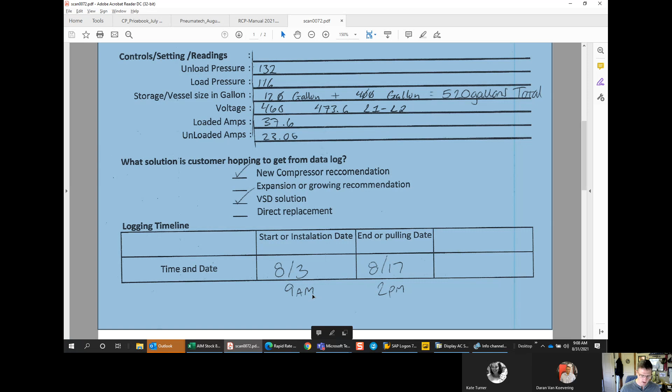And then the next page on this that I recently added was just a block diagram, right? Just tell me in general what they have. So literally, it doesn't have to be fancy. They just drew this out, right? Box with a compressor to a manifold out to 2 tanks. That just gives me an idea of what I'm working with.

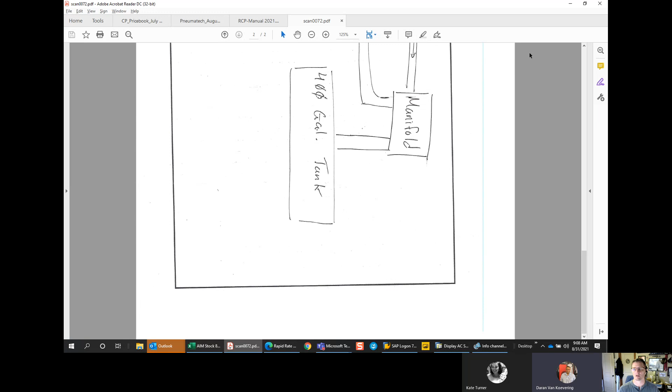Okay. So what I do from there is I come into AirChitect, and we're just going to start a new project presentation. So we click on this first one, name. I'm going to put warehouse services, Portland compressor, evaluate compressor room, company name, services. I'm assuming this is Oregon. They didn't give me a contact person. They didn't give me any of that information. So I'm just going to click next.

This is where we change it. Right now it's at 12 cents. So we're going to change that to 0.065 because that's what they're saying they pay, which is ridiculously cheap.

Do you ever have people just straight out say they don't know? Oh yeah, most people that don't know, I just use 12 cents, between 8 and 12 as the average. And I do it for 48 weeks a year. There's 52 weeks in a year. I just choose 48. It's also the default in the system, and it works pretty good.

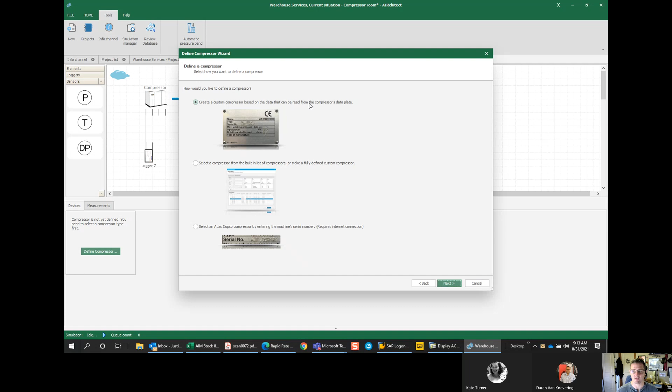We'll click next. We're going to create a custom based on the data that can be found on the compressor's data plate, which hopefully they gave you that information on this critical data sheet, but most of the time they don't. So we got to kind of wing it. So the name of the compressor is just compressor, right? We can say compressor 1.

Manufacturer is Chicago Pneumatic. It's red. Actually, we're going to make it gray. It's a fixed speed. He said it's a 50 horsepower, max 125, and it's 460 volt. And I got that information off of the critical data sheet.

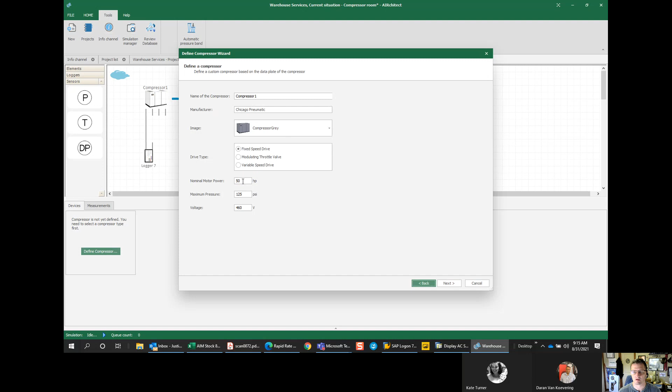60 horsepower. Hold on, wait a minute. No, I put in 50 horsepower. Okay, all right. So package horsepower is 50. I don't know why it said 60. And the CFM on this is 230. And unload power, I don't know what it is. I'm just going to leave it at 15 because that's fine. I could actually go in and find out, but I'm not going to worry about it.

They have this sucker way maxed out at 132, which I don't know if it'll take it, and 116. We'll see what that does, and then finish. So now we're telling the program this compressor is at 50 horsepower. Now we're going to upload that data. So all I'm going to do is I'm going to take my logger here and I'm going to take my cord and I'm going to plug it in.

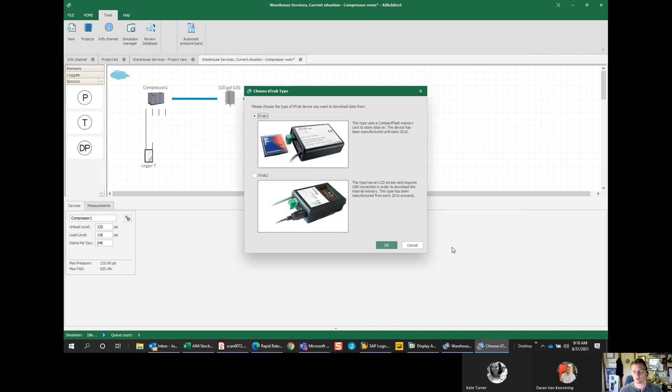And then my computer should find it. This is an iTrak 2. So I'm going to click OK. I'm going to find it on my computer, and we're going to hope to God that it downloads. And this one is going to work because it's saying read log. So when you see read log and that bar going across, it's actually pulling data from this logger.

Now, when I ship the loggers to distributors, I do not put batteries in them. They can put their own battery in it. And then when they ship them back, I just tell them to leave the battery in it. It doesn't matter. This one should still have the battery in it. Let me check. Yep, it still has the battery in it. And it should work. So now that you see the bars next to the iTrak logger here, it's filling up. So that just means it's actually working, which is good.

So what if they pull the battery out? Does it still have all the data and everything? Doesn't lose any of that, right? It shouldn't, no. I've had it do funky things and had to put a battery in it. And as long as I can go back and pick the date that they started, it tends to work just fine. But like this one here, if we look, this is a verification. Okay, so this one, we got the voltage. It's got data on here from 6/9 to 7/13. And we logged from 8/3.

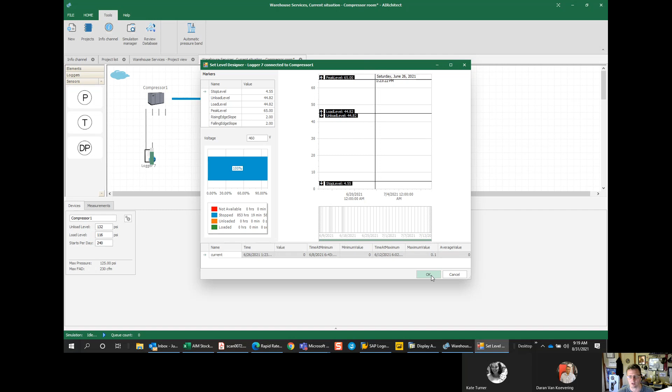So we're just going to say this is correct when in reality it's not, because they told me that they started it on 8/3 and 8/17, and there's nothing on these dates within this table that are remotely close. So I'm just going to click OK for now, just so we can continue on. We'll say that's right, but it's really not. So I'm going to have to ship him another logger, and then he's going to have to put a battery in it. All right, so at this point, when you have the little blue globe, that's good. That's what we want.

So this is the current situation. You go back to the project view, and we have the imported compressor room. Now the profile is disabled, which I have no idea why. We're going to save this here. Oh, here it goes. Now we're running down here in the bottom simulation. So now that I picked this compressor and uploaded data, it's just going to merge it together, is basically what's happening here. But now we just have to wait.

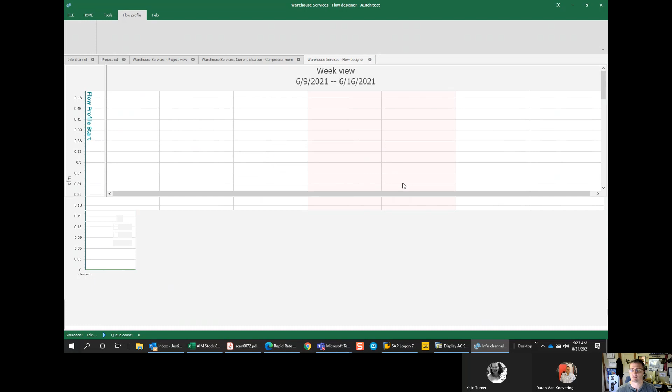Let's go back. There was like nothing on there. There's nothing there. How I can tell that there's nothing there is this is just a simple bar graph. Okay, if there was actually data here, it would be all over. There'd be a graph going across this. This is a workday, workday, workday. These pink columns here are the weekend, right? So this is Friday, Thursday, Wednesday, Monday, Tuesday. So this is 7 days. There's just no data on this thing.

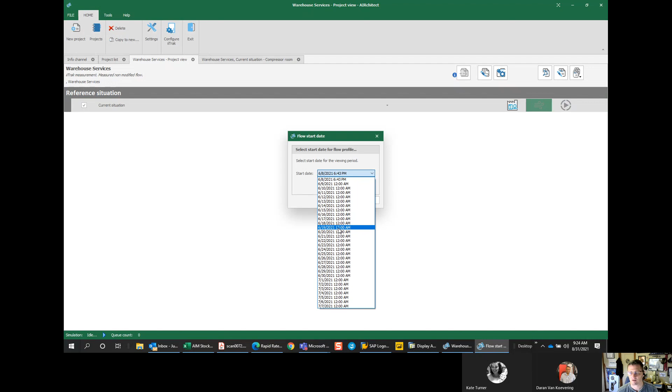So let me go to 6/16, see if there's something there. There's not going to be. You can tell by the dates. Yeah, there's no data here. Okay, so this is what we're going to do.

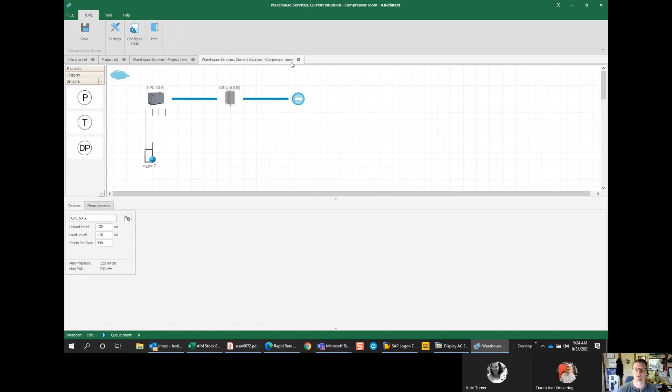Remember, Justin, you don't have to waste your time. Daran and I are always in. Next time you get one, just holler and we'll walk through it all together. This at least gives us an idea, at least preps us for it. So, like, don't waste your time with this. Oh, you're good. I'm just going to go to a different one and show you guys.

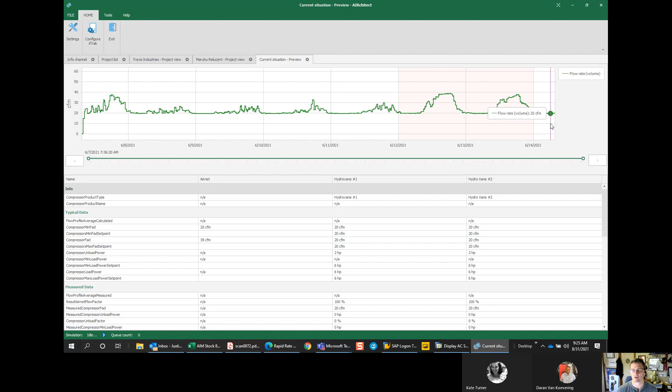Because the beginning is still all the same. These are all data logs that I've done over here. Here we go. All right. So this one. So this was the situation, right? This was the compressor room. So this is where we went through and picked that date, right? Once we pick the date and it picks those 7 days, we just have to look at the data. So here's the current situation. See, this is the flow all the way across here. So this is Tuesday, Wednesday, Thursday, Friday, Saturday, Sunday. So they're running it all the time.

This magnifying glass here allows us to zoom in a little bit more on the data. So the situation here was they had 2 Hydrovanes, okay, with 180 gallons. And down here on flow pressure status, I'm going to click on this other magnifying glass to zoom in to have an idea of what's going on. Okay, so if there would have been actual data on this logger from Portland Compressor, this is where we would be. So this is this 7 days.

So what I'll do is I typically export to PDF this day, so we can look at it and have a conversation with the distributor and the end customer. And then what I'll do is I'll grab this. Hey, why that day? So that's just the starting day? Is that what that is? This is the week. This is all 7 days here. So you're going to export all of them? Yeah. So, and what it looks like when I do that, because this is Maru.

Let me see here. Hold on. Maru. Who is Maru with? But it shows that like number 2 is just running unloaded all the time. Don't you ever have to adjust some of the kW so that it's actually capturing and showing loaded? Do you ever get it where it just shows that it's running unloaded all the time because it didn't get the kW right or something? Hold that thought.

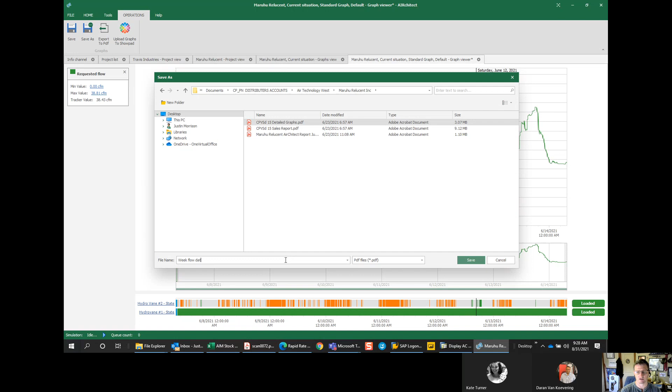Let's see here. Maru sent. Hold on, I'm finding the. Oh, that's not what I wanted. Air Technology West. Okay. So what I do here, I had to remember where I saved these files. Bear with me. Air Technology West. Here's Maru. So this is week flow data. I'll show you what that looks like here in a second.

And then on the left over here, this is CFM. And then down here's the date stamp. So what I'll do is you click and drag this over to zoom in on a day. And when you zoom in, you actually see what's going on. Now, I pick the heaviest day, right? That way we can actually have a conversation of what's going on.

And what I mean by that is, if you look here, you have peaks and valleys, right? So on Saturday here, it's at that high flow for the longest. So when I zoom in and I do a day, I will export this and say day flow.

Because sometimes going through all the work of doing a report is useless and they don't really know what's going on. And you can just have a conversation with these simple graphs or ask some questions.

Come on, catch up to me.

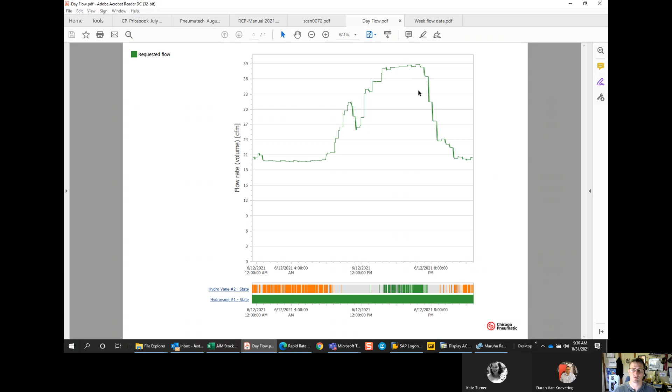You have a very constant 21 CFM load or leak load. That could be the leaks in their building, or they're running a CNC machine at night, something. And then whatever you start at, roughly 8 a.m. in the morning, your flow goes up. And then for 4 or 5 hours, you have a constant 36 CFM demand. Does this sound right? And they'll say yes, no, they don't know, whatever the case may be. That's where you can actually show them the data of what's going on.

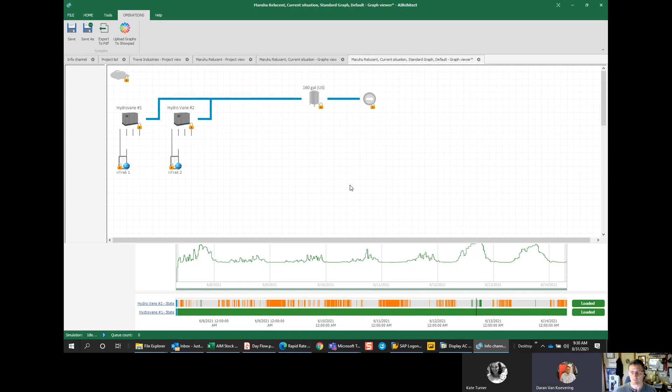Okay. So when you look at that magnifying glass, it's just a snapshot of what's going on. So now we look at all of that information, and then we actually come up with some simulations. So let me go with this Travis here. Back to Maru. So on Maru here, we're going to say those two machines we want to replace with the QRS 15. So on this button, you add a new proposal, which gives you a new factory.

I click and drag a compressor over. And then I added it into their system. So this is the QRS 15 base mount. Here it is here. I added it to their existing situation. And now I'm going to run it and see what this 15 horsepower will do for them. What AIRchitect does is it takes that data from the original equipment, and it says, how would this QRS 15 run in that same situation?

And then I ran a variable speed as well, which is the whole idea behind AIRchitect, to sell variable speeds. So I ran a simulation for both, and this is what we ended up coming up with. This one's actually running right now, so it's only 30% done. But you're adding this to the system, right? You're not saying to remove any of their existing equipment?

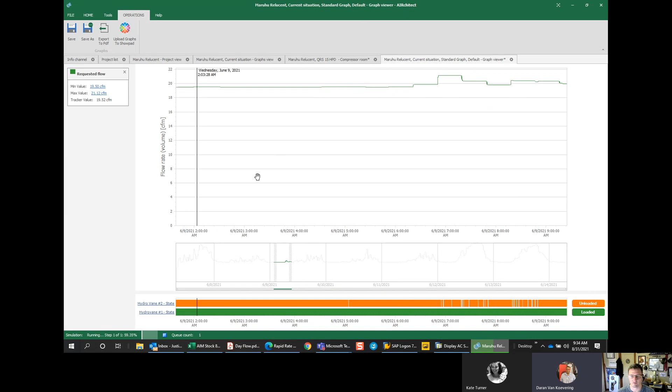Yeah, well, absolutely. So that's where you're just looking at the highest demand and the lowest demand, right? So if we look at the lowest demand, let me zoom. We'll go here. Yeah, look, you have a machine that's completely unloaded for hours at a time. Yeah, see, that would be more an issue with settings or something like that in the machine itself, right? Because that's not normal. It shouldn't be just kicking on and immediately going to an unloaded state. I mean, it should always start loaded at the beginning of every one of those breaks.

Yeah, yeah. I mean, and that could be fixed potentially with a pressure adjustment, right? The pressure band might be too tight. I mean, you're saying it could be in the machine itself, but couldn't it also be in just the data that was imported or selected at the beginning? If you have maybe the loaded KW just a little bit too high or something, then it won't quite reach that. It'll keep thinking that it's unloaded every time it's really loaded.

Yes and no, but I mean, we're not really using real KW. We're using the amperage, and we're using the algorithm to generate a report. It takes an amp reading every second, and with the load and unload settings, we generate what the KW usage is, and then we estimate what that power is. The issue that we have with these is that ultimately it's a guesstimate, right? And it's just the machine. It's not the entire system.

So that's why the QRS 15 HPD is negative 25%, and this variable speed is 14% savings, which is better. But if I went through and really adjusted and modified the settings on this 15, I could get that down to zero, if not 12% positive, because I can actually go in and adjust and modify the controller settings itself. Right now, it's set at a default unload minimum of 3 minutes. Well, I can just cut that down to 20 seconds and shut that machine off, you know?

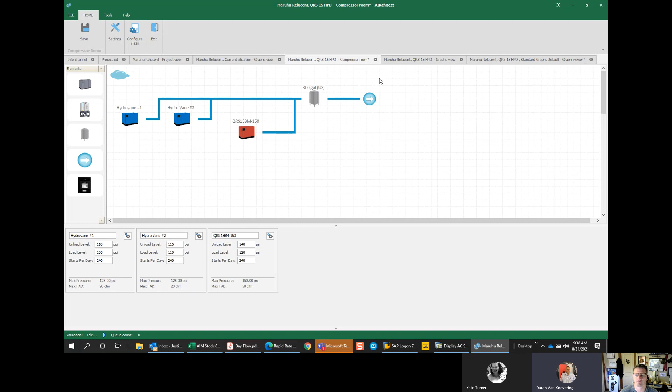So that's what it looks like. And then when we go to the low demand and we zoom in, you can see the sucker just loading and unloading a lot. So the 15 horsepower is going to help them, no problem. It'll handle it. It's not a bad choice, and the reason that I say that is this gives them room for growth. We went from 40 CFM to 50 CFM. Okay, so I mean he's got roughly 20% growth there. That's not bad at all.

But if we look at the variable speed and we go to the same graph, now we can do the same thing. Let's look at this heavy demand. And I can export this too if we want to PDF and have a conversation with the guy. It just depends on your customer. And we can zoom in and you'll see the variable speed. Wait a minute. Oh, I'm on the wrong one. No. Sorry, it didn't open up the right one. Graph view, close. CPVSD, here we go. Here's the variable speed.

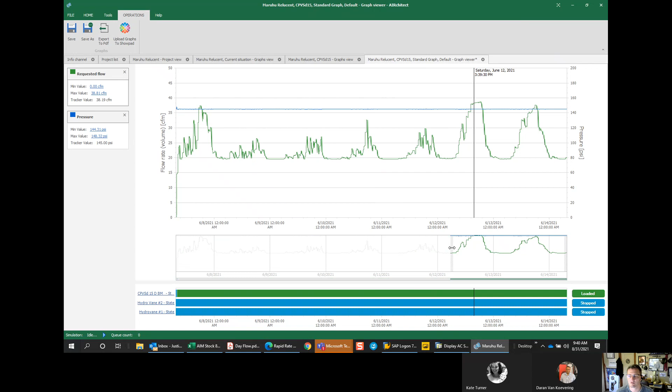Yeah, it just runs loaded. It's great. But where it saves its money is when it's down here on these lower flows, we maintain a beautiful 145 PSI, no problem, 145 PSI, but it's only charging him the power of a 5 horsepower, this one. That's where the VSD makes its advantages, right? That's the whole benefit of it, is that off time. Instead of the fixed speed, it's a 15 horsepower bill the entire time versus this one.

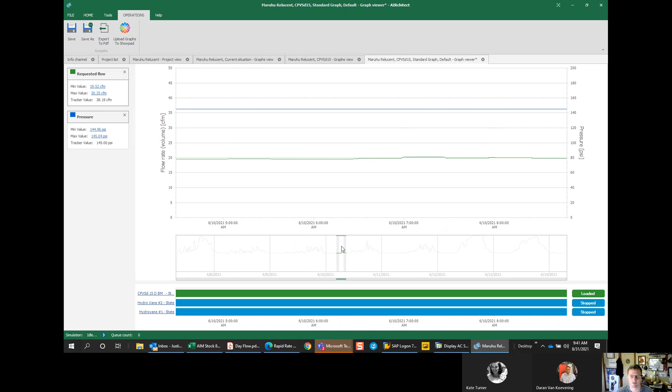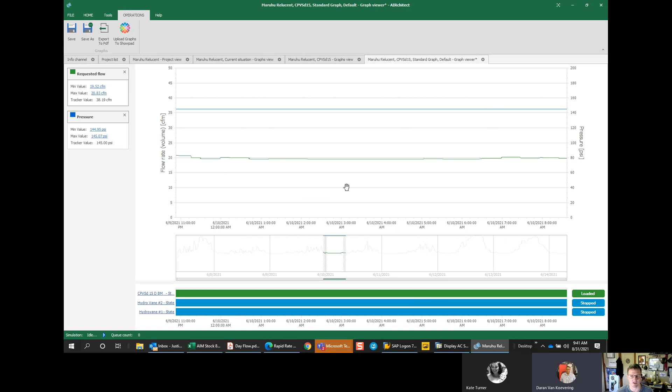Now, do you ever look at if they have their compressors on overnight or something when they're not there, and ever do any kind of leak detection? Exactly, all of this tells you that, because this is a 24-hour shot. So you can ask them, what are you doing at 1 o'clock in the morning? Because at 1 o'clock in the morning, you have a 20 CFM demand here. Right? Yeah, so that's 20 CFM demand. Is that a leak load, or what's going on here?

Because out of the 7 days, you're using air for all of it. So if you don't need air in between here and here, then we need to shut the compressors off. If you buy one of our newer compressors that has the built-in clock timer, we can actually tell it to shut off at this time and save you an additional X amount of savings. So there's a bazillion different ways you can take this. It just depends on what they want.

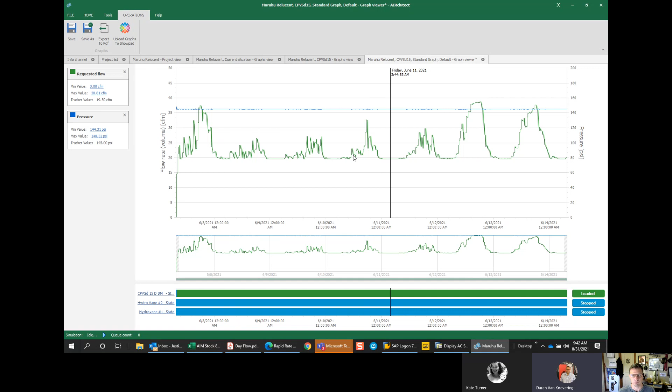So you get all of this, right? You evaluate it, you have your conversation with the distributor, and the distributor's like, yep, they want to go with the 15 horsepower variable speed. You click this check mark, you check the box over here, and you come up and you create a report. And then it'll generate this report for you.

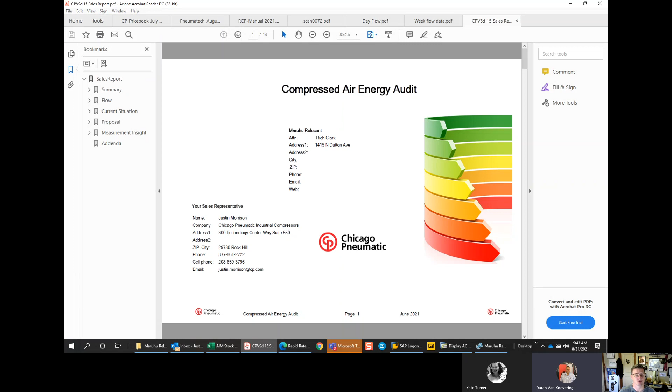Now, does it put any dollar figures with their power cost or anything? Does it say you will save this much money per year if you switch to this? Does it give them a dollar amount? Wait for it. Our reports are garbage. The generated reports, in my opinion, are absolute garbage.

Okay, so when you generate a sales report, this is the sales report that it generated out of that. When I click that check mark and say generate report, this is what it gives you. I didn't have all the customer information, so it's not here. It puts my stuff in there because I'm the one doing it, I'm on my account. Next thing it says, it's going to save them on average $976 a year, 14% energy. Now, great.

It's okay. When you look at the price difference and the ROI on the variable speed, you're talking a 5 to 8 year payback. That's why small variable speeds are extremely difficult to sell based off of just sheer energy savings. But it does give you a number.

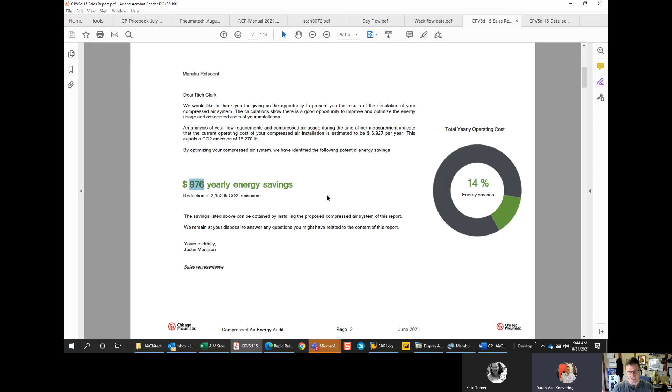Yeah. Is anyone in California or in your area looking at the CO2 emissions or anything? I know it's pretty useless over here, but I think maybe Europe and some other countries use it, and maybe California. I don't know. Does anyone look at those CO2 emissions? Not so much anymore. It's becoming a thing slightly, but not really.

So within the summary here, this payback period, you can actually go in and plug in the actual cost of the equipment, and it'll tell you what that payback period is going to be in months. I did one, for example, where it was a CPVS 150, 100s, and a 75, and it was like a 14-month payback at list price. It just depends on how much information you want to put in there. I choose not to do that most of the time because I don't know what the distributors are selling at. So I just let them plug that information. Yeah.

Some of the things I don't like about the program: for example, yearly is based on 12 cents per kW, when on the slide before, I literally put in here that we changed it and it's based on 0.065. We changed it, but the template doesn't change it in all the places. It drives me crazy.

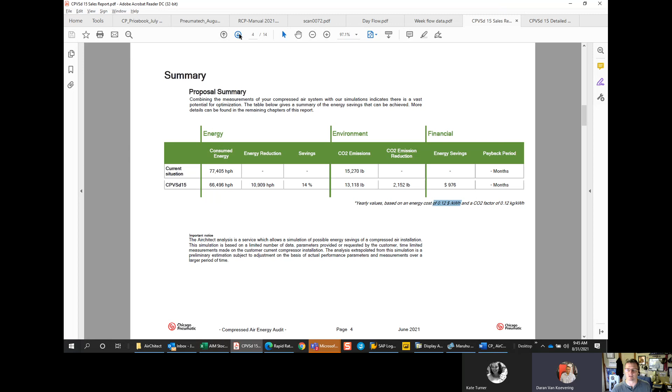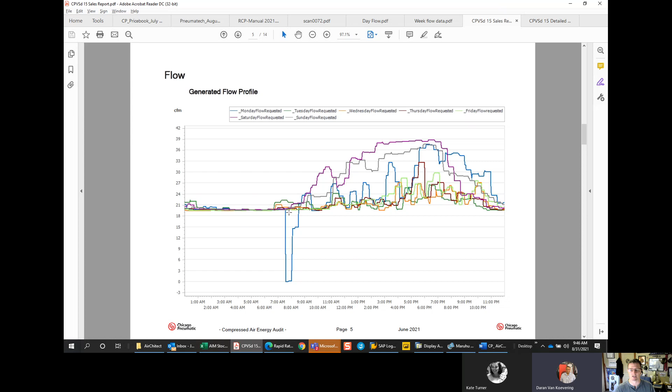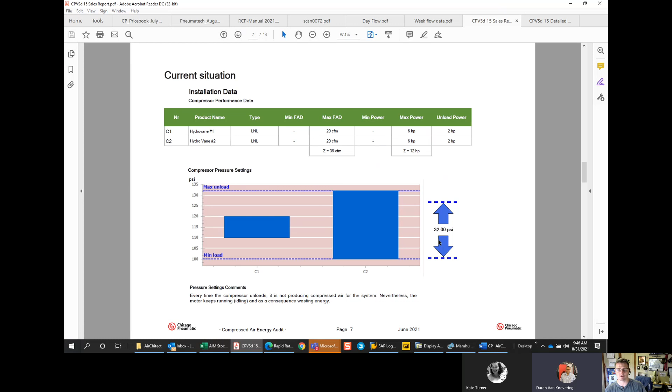It gives you a simulated flow of all 7-day overlay. Each day has a different color: Monday, Tuesday, Wednesday, Thursday. So this is what the flow data looks like. This is what we started with. They're 2 hydrovanes. This is how they are running and what it costs them, right? This is the pressure band, it's a 32-pound pressure gap, which is ridiculous.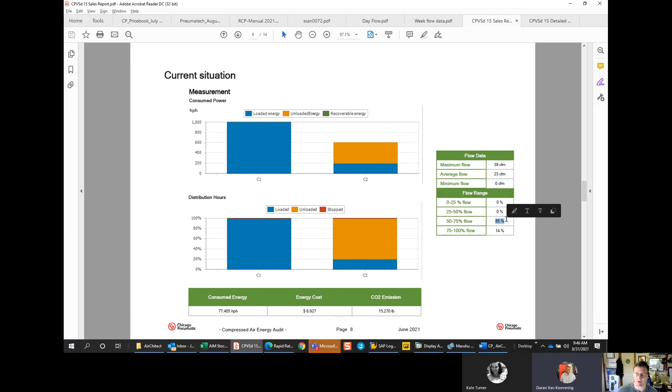This is the current situation in energy, what it's actually costing them. Their max flow, their average flow. 85% of the time they're in the middle, right? Or from 50 to 75, 14% of the time here. We're proposing a CPVSD 15 added to the system. And we went to 300 gallons worth of storage. I actually increased the storage on this one.

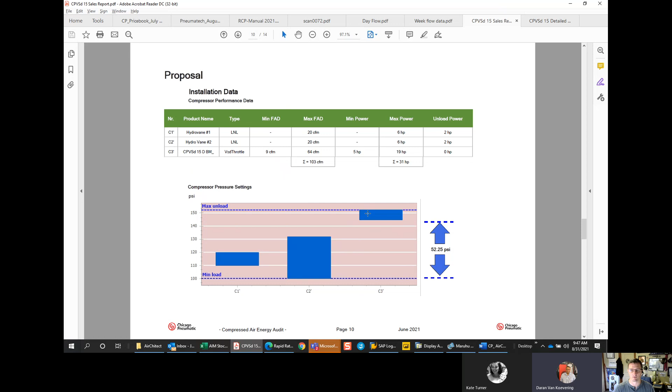I left it with a 52-pound gap because I got the variable speed running right here. That's the pressure band of the variable speed. I have these ones way low to ensure that they're not running in the simulation. And if they are, then we have a serious problem. At the end of the day, the control gap really is only like 7 pounds, 10 pounds tops.

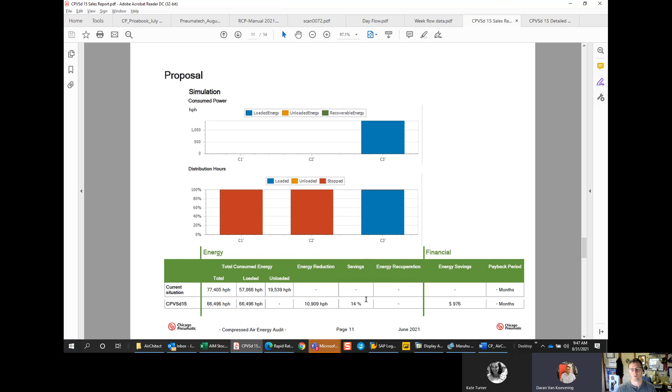Now if we put them side by side, their original 2 compressors are stopped the entire time. They never run. Compressor 3, which is the variable speed, takes the entire load, which is where we get that 14% savings, and we save them $976 a year. And then that's all the report is. We go from there to a simulation and a graph.

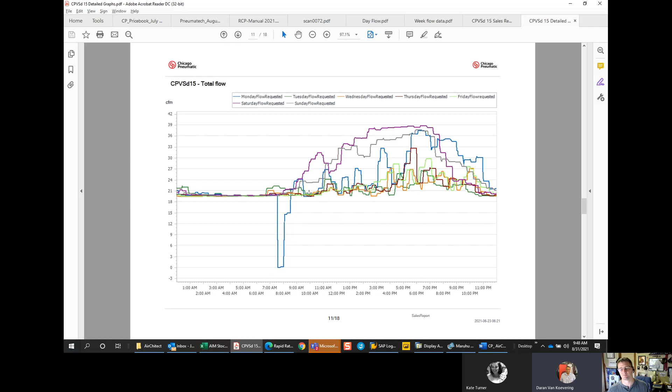The other thing that you can get from it is a detailed graph, which is all 7 days and then each day broken down individually. And we do a simulation of the variable speed. So this is the variable speed running the same simulation, that data and how it runs, and it maintains perfect pressure. It never drops below. It maintains pressure on all of those same days, identical, because it can handle it.

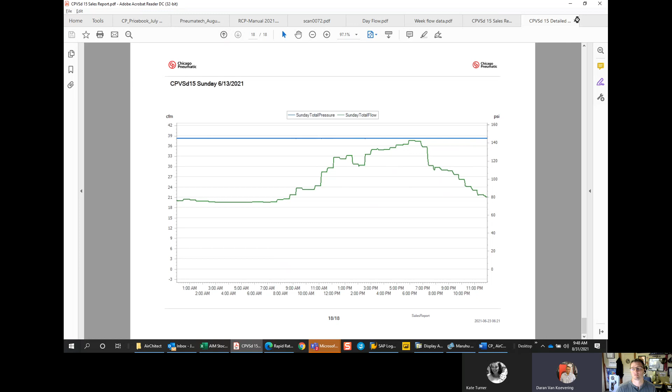And then, because I was having luck with AirChitect, but at the same time I wasn't having as much success as I wanted, I came up with a new template for the reporting that is more sales based. So I came up with this report, which is the one that I actually did for this distributor for this simulation. It's got a nice introduction and then the purpose of the investigation. It's got a couple more data, some charts in here.

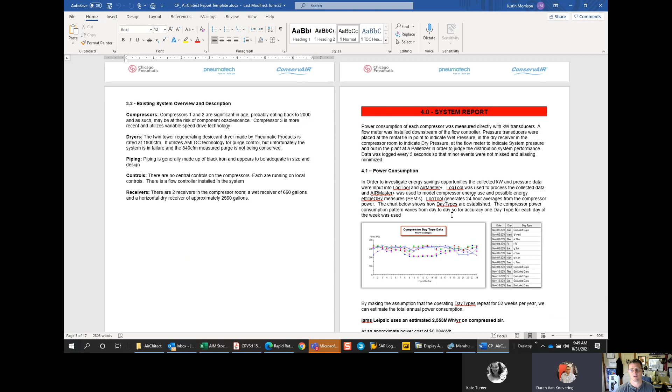Oh, this is the general template. Excuse me, that's why it's all mixed up. But it's got a little bit more of an idea of exactly what is going on. It's a little bit more intuitive, a little bit more detail oriented. Yeah, it's good. So on this one, you just manually go in and put each graph in, or is this actually run as a template for you and generate?

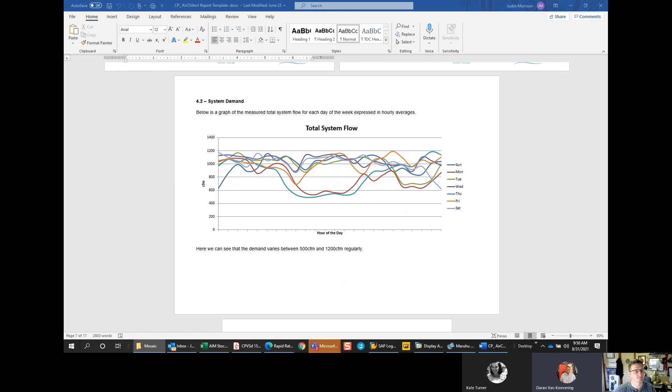No, this is the template that's generic, and then when you actually do one, I just copy and paste some of the pictures and graphs out of AirChitect and out of those reports into this template. So, for example, I did one for Mosaic for Sierra Machinery. So I took my template and put it in there, and then I made it into this. I made it a little bit more personal, of course. And then I added different graphs.

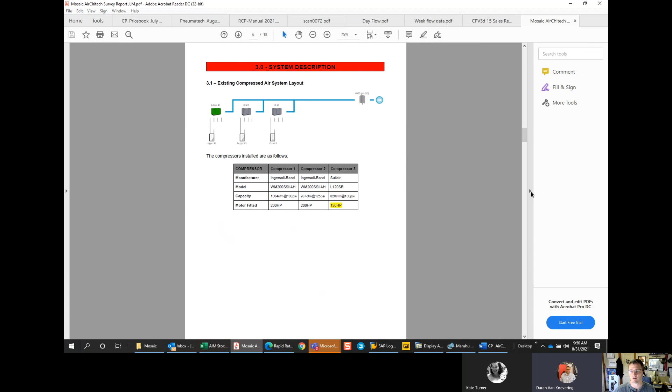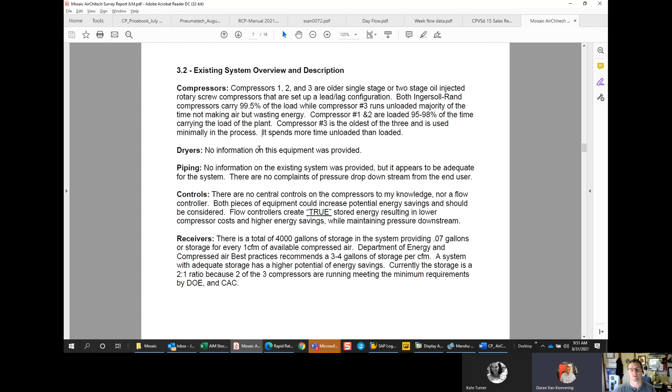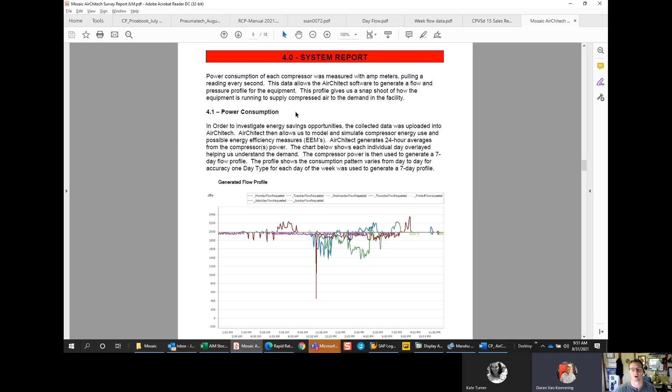Like I took the existing air system here. That's straight from AirChitect, right? And then I plugged in their individual information. And then I gave an existing overview. So compressors 1 and 2. This is what I see, right? Piping, controls, receivers. And here's the system report. This is the generated flow, again, out of AirChitect. And I adjusted all of these paragraphs to match the individual distributor.

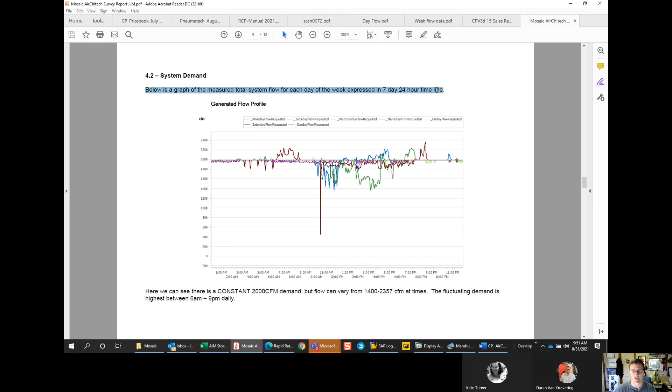This is another snapshot from there. And I added all of this from what I could see and typed it in. I snapped this, the system efficiency. This is, again, right out of the AirChitect report. I just changed the layout and added more information because you're limited to what you can add within AirChitect. It gives you that generic, which is, like I said, kind of garbage. And then I took a 7-day screenshot from it, put it in here, added a little bit more of an explanation of what I see.

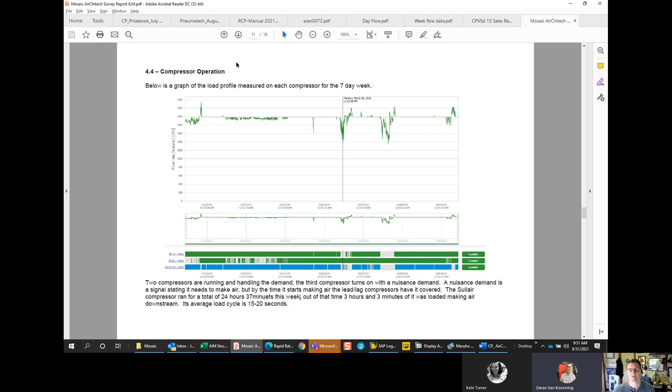So, all said and done, after I decided to develop this newer template, newer report, it's an 18-page report. So now they got something with value and some meat behind it to actually have that discussion with the end user about what we can do, because more often than not, we're not there. So do you physically give them the report, or you just cover it with them? I try to physically be there because our distributors don't know what the hell they're doing the majority of the time.

I'm saying for this report, if you do the audit for free and give them the report for free, they could obviously easily just take it to someone else and say, here, this is what I want, and not get it from you, which is why I used to always try to just physically open my laptop and walk through the report with them, but I would try to avoid printing off and giving them the actual report.

But yeah, I gave them the physical report most of the time. That's exactly what I do, is give them the physical report. At the end of the day, the distributors can give it to them if they're doing it themselves, but it just depends on the situation. I was not able to get a face-to-face with this, and they wanted a report, so they got one.

I was trying to sell three 200 horsepowers. We lost this job because of our lead time. So I gave them the report in this situation. Most of the time, I'll just send them over a couple snapshots of the flow and say, have a conversation with the guy and go from there. If he wants an actual report, we can do something different.

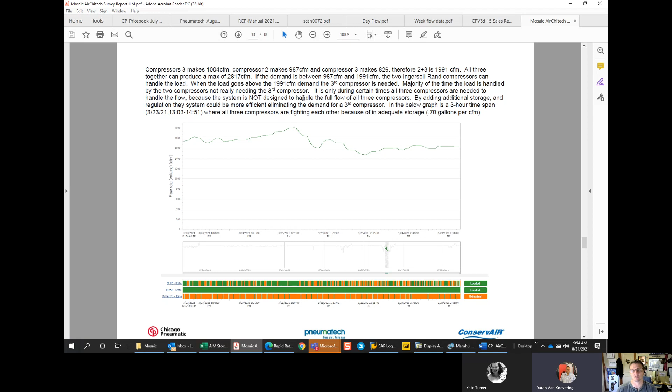But yeah, this 18-page report takes some serious time. So I'll do this on the bigger ones. Like I'm doing one for Klein Tools right now in Texas, where they're getting 150 and 150 variable speed. That one's a little bit more intuitive, but more detailed, so it's just kind of case by case. But I did notice that once I came out with the more detailed reports, I was getting better feedback and also success in selling compressors. So that's the primary reason I did it.

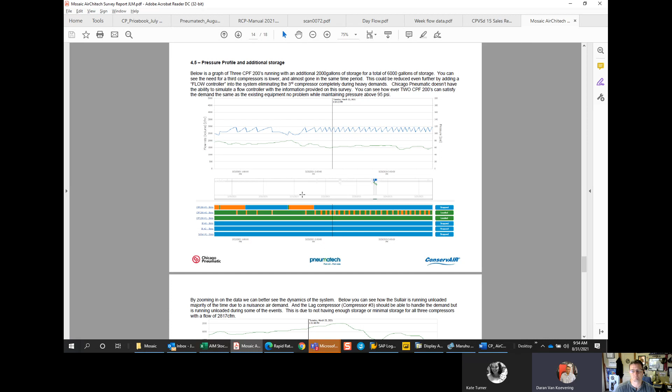Yeah, it's good. And then I was going to say another strategy that I know some people do, which may or may not work, is to initially charge for the audit or the report, but then tell them that you'll credit them everything back if they buy a compressor. Yep.

I'm not opposed to that at all, but man, at the end of the day, I got to sell compressors. And there's no cost to me other than my personal time doing this. Anything to try and show the value with the distributors; the ones that get it start to do it, they love it, and I move units. So if they want to charge for it, I tell them they can do that. It just depends on their strategy.

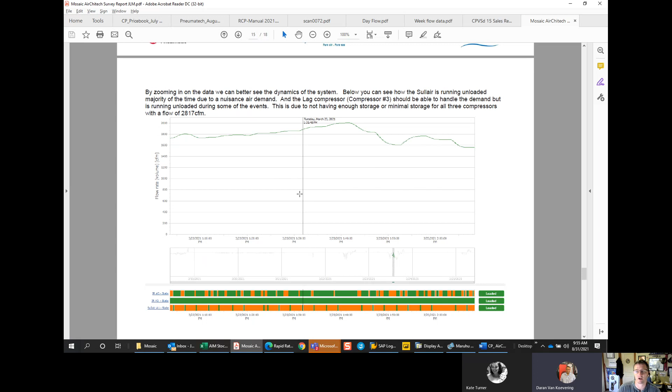And then all the way at the end, I do conclusions, and then I do solutions, and go from there. Because I'm not quoting equipment. If it was me direct, I'd have a quotation and everything to go along with this, but that's not me. I'm trying to support and sell the distributor. So if it's nothing too bad, I'll just use the automated generated report to the distributor. But if it's a bigger project that's more serious and it definitely looks viable, I'll do the work and use that template that I made and put more information into it, and present better.

Yeah, looks great. At the end of the day, that's really all it is with AirChitect. Getting the loggers to the distributors, getting the loggers back, uploading it, and generating reports is not difficult. It's actually relatively easy. On the M drive, there's definitely the videos that you can go through and watch step by step. Some of them are a little dated. Crystal Yang's got some great stuff as well. It's gonna take you a couple hours the first time because we've just never done it, you know.

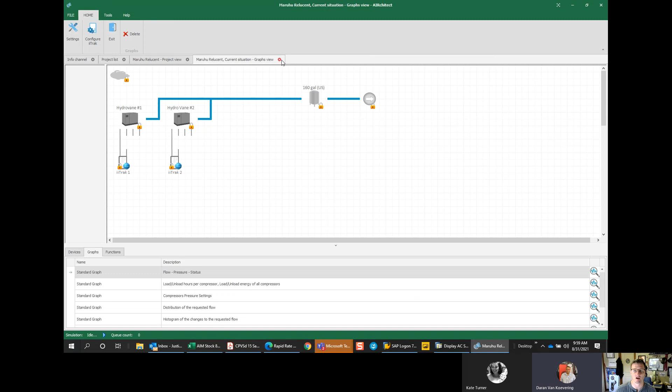Our point of contact or preference is definitely Crystal Yang. There's a language barrier there, but she's really good at getting resources and pointing you in the right direction. So if you need some training tools or anything, I definitely prefer her, because some of the stuff that we have is outdated.

Every time they do an update, it's kind of tricky as well. For example, the loggers you're going to get, I guarantee you'll have to do an update on them because they've been sitting there so long. They're brand new, but probably four or five years old at least. To update them, you plug them in, download the logger upgrade, and get them up to software version 2.011. Every time they come out with a new upgrade, you've got to upgrade all your loggers.

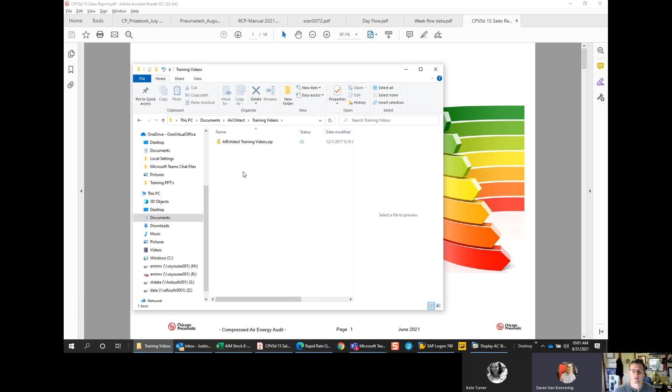Sure, we wish, but no. When you start having problems and the thing doesn't work, your rep says, oh, have you done the upgrade? And you're like, no. Oh, well, just go to the AirChitect web page. Let me see if I can find it real quick, because I think I have it. The blog, it's right there. The AirChitect forum on the drive. Oh, that's still not the right one.

So is Joe actually doing a lot of audits too? Yeah, Joe does it. Him and I, in the very beginning, we were doing quite a bit. And then depending on how busy you get, they come and go in waves.

But this AirChitect forum is where you're going to find most of your training. The video channel is on here, tips and tricks, Q&A, training material. This is all off the hub too. So here's more training videos that are definitely more up to date than what we have, that's for sure. Perfect. Thank you, Justin.

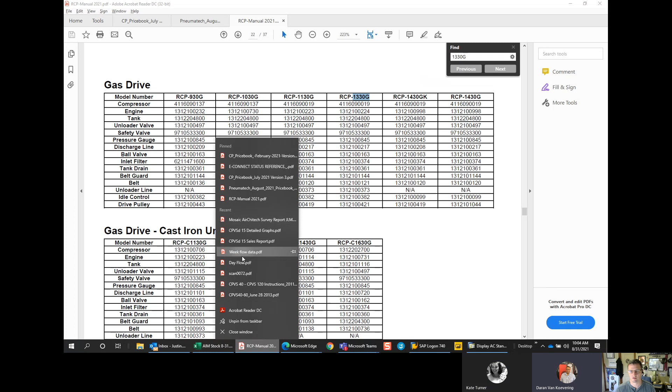I wish I was not. Are you studying? You know, like when you're looking at the week flow, when you look down here, you're like, okay, well, you're still using like 20 CFM all the time. So what are you doing here? Are you running 24/7, 365?

Well, no. You don't shut your compressors off at night, do you? Well, no. Oh, well, you have a 20 CFM leak load, man. How old's your pipe? How about we look at some? You know, that's how you can start to take that conversation. But little things like that you'll start to pick up after you do it because you start seeing these graphs.

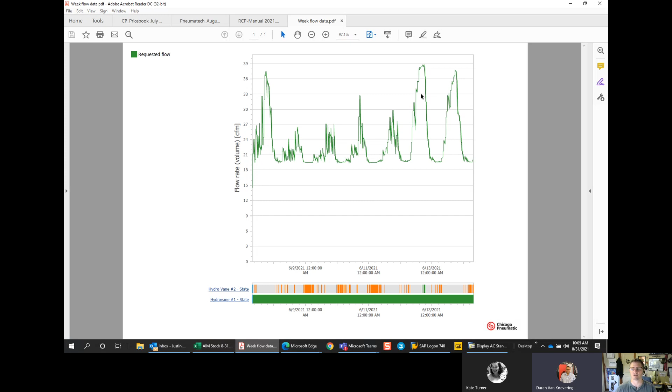Yeah. But yeah, get some data, start doing it, and then you guys will be good to go. Of course, follow me along the way, I'll help you out. I'm always willing to help. It's just going to take some time. That's really what it's going to come down to.

That's all right. Yeah, Kate, if you can set something up with Universal locally or something, that'd be great. Yeah, they'll be all in. They'll do anything we want. So absolutely. Yeah, and then even on the M drive, or from Crystal, or if you go to the hub and find the AirChitect forum, there's an updated PowerPoint on there for training. I would highly recommend downloading that one and using it to go through, but like I said, it's just going to take you a while to get used to it.

All right, you got it. I'll find that too. All right, thank you, Justin. Thank you so much for taking the time. Thanks, Daran, for the equipment. Put it on my list, and I'll learn something for sure.

Yep. And then, hey, Daran, Shelly's got to get with you on an order that's all jacked up with options from the factory. A CPBG 50. Yeah, the 50 and 29. It's the same option part number, but it looks like the option part number for the graphic controller has changed. Yeah, I just talked to her about a CPBG 50. Okay.